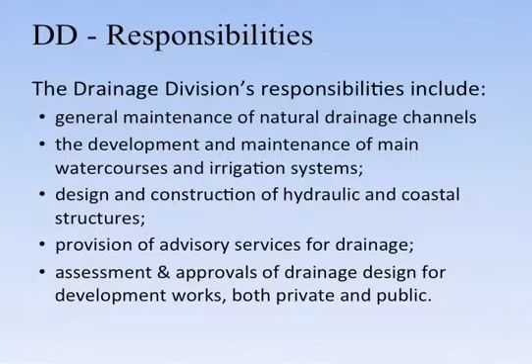So, without much ado, we'll now proceed to the role of Drainage Division as it relates to the challenges of disaster preparedness and management and what attention is required. But first, we must start from the beginning. Drainage Division. Drainage Division's original responsibilities involved only maintenance according to the Waterworks and Water Conservation Act. Over the years, the roles and responsibilities have expanded and evolved to include designs, construction, coastal approvals, land development approval, and a lot more as shown in the slide.

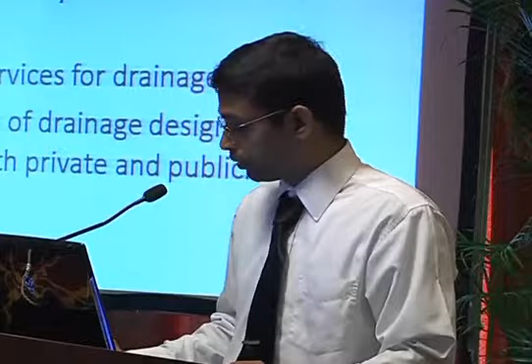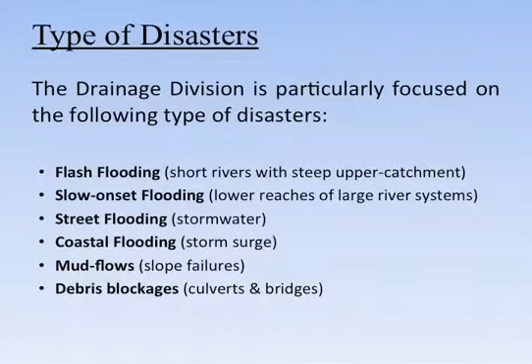Type of disasters. I don't have to elaborate on disasters because it has already been done from the start of the section. Now, notwithstanding the administration and financial challenges, Drainage's main focus is to identify the type of disaster that occurs, such as flash flooding, slow-onset flooding, street flooding, mud flows, and debris blockages. This is essential to providing a correct solution as well as a course of action in the event that these do occur.

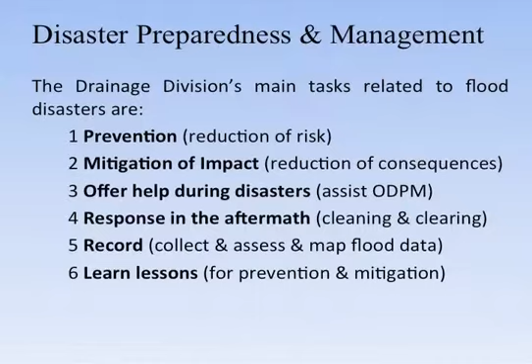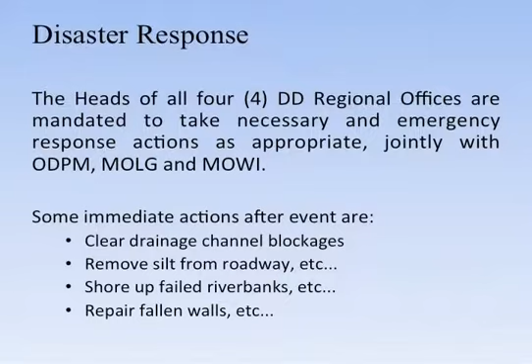So, what happens then? The drainage main task is to identify a process by which they acquire knowledge and shift their focus on flood mitigation measures to concentrate on the problematic areas. Based on the related tasks, such as the response and the aftermath, it involves clearing and cleaning. Emergency actions are taken with the respective approval. These are actions taken in the aftermath of flooding that occurs on, for example, the PBR bus route or the Eastern Main Road.

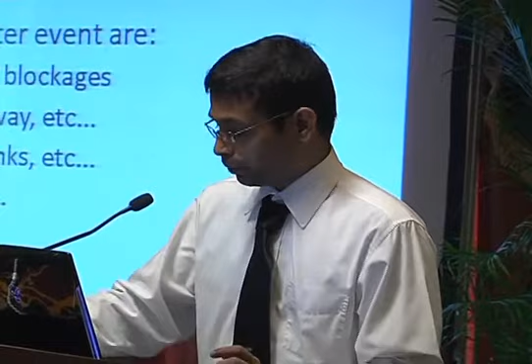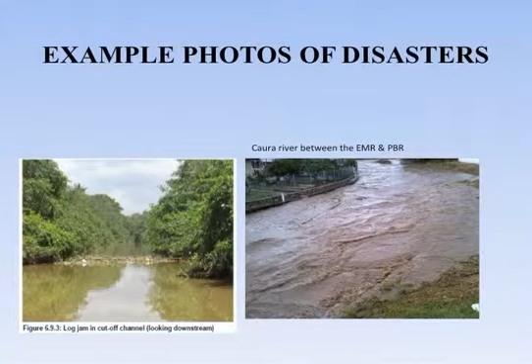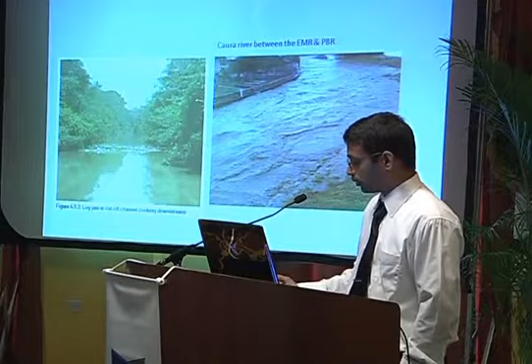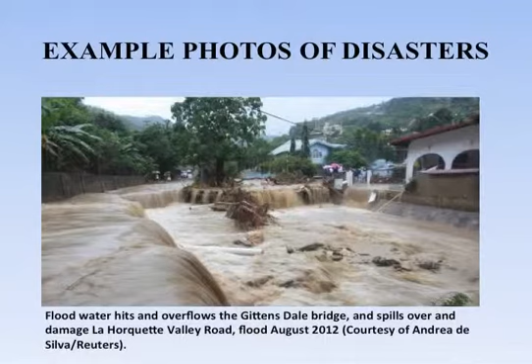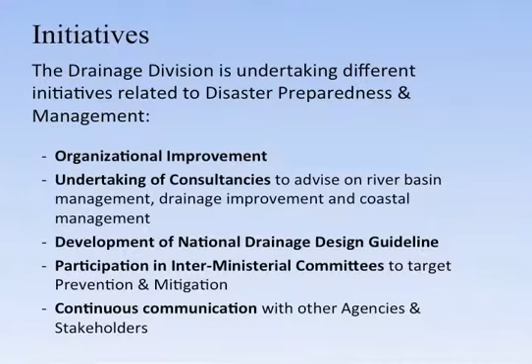Initiatives. In keeping with the drainage motto, working harder for a better tomorrow, Drainage has cross-examined the organization, hired external expertise such as consultants, developed new guidelines, and set up a steering committee to deal with the problem in a more proactive way.

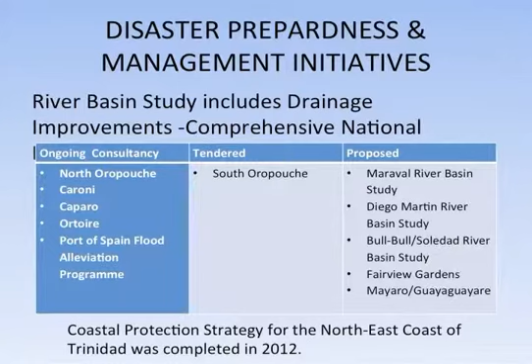Now, Drainage has more focus on the river basin studies, which outlined the ongoing consultancy, tendered and proposed. They also have the coastal protection strategy for the northeast coast of Trinidad, which was completed in the year 2012. The objectives of these studies are to mitigate the frequency and severity of flooding, optimize the use of available water resources, and reduce environmental degradation.

The North Oropouche River Basin Study. The North Oropouche River watershed is located in the eastern part of Trinidad and drains approximately 425 square kilometers, approximately 8.5% of Trinidad. This watershed harbors approximately 48,000 persons, who have experienced flooding in low-lying areas. For the purpose of the study, it was further subdivided into 4 zones: Lower Oropouche, Gunness River, Sangre and Guayco River, and other areas. The solutions presented are very similar to other studies, which are summarized later in the slides.

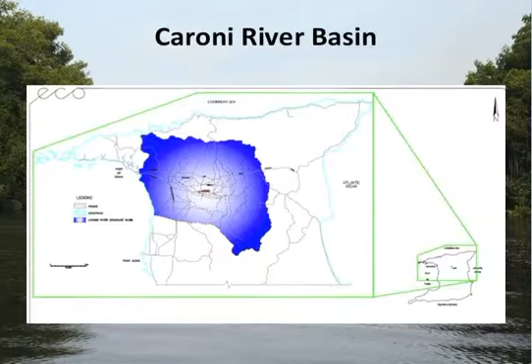Caroni River Basin. The Caroni River Basin is one of the largest in Trinidad. It originates from the confluence of the rivers Aripo and Komoto in the central part of Trinidad between the northern and central ranges. Water discharges into the Gulf of Paria just south of Port of Spain. The Caroni River Basin drains approximately 750 square kilometers of the north and central range of the island.

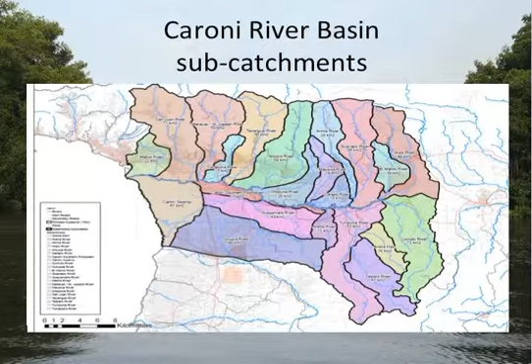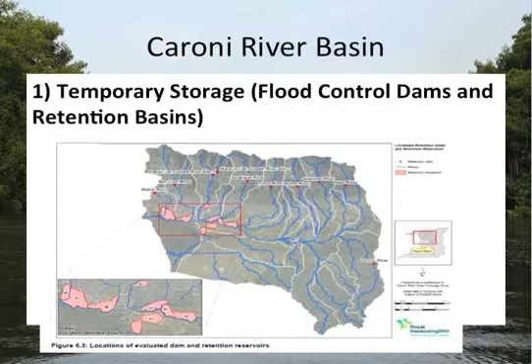As we can see here, the software used was HEC-HMS. They subdivided it into different catchment areas for the purpose of design. They were designed for 1, 5, 10, 25, 50, and 100 year return periods. This was modeled accordingly. Several solutions were identified, and the major solutions for the construction of flood control dams and retention basins are shown in the next slide. This map shows the approximate location of the Caroni River Basin, and where the dams and retention ponds are to be placed.

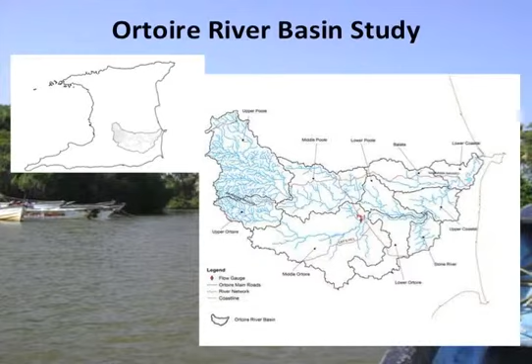Ortoire River Basin. The Ortoire River Basin is Trinidad's second largest river catchment, approximately 475 square kilometers. The western area is characterized by sloping lands and minor watercourses and is relatively densely populated. The strongest feature is the Naparima-Mayaro Road, running in an east-west direction. The flood zone areas identified by the consultants are shown in the following slides. These are the more concentrated areas in which they have done the analysis, data verification, rainfall data analysis, and proposed solutions.

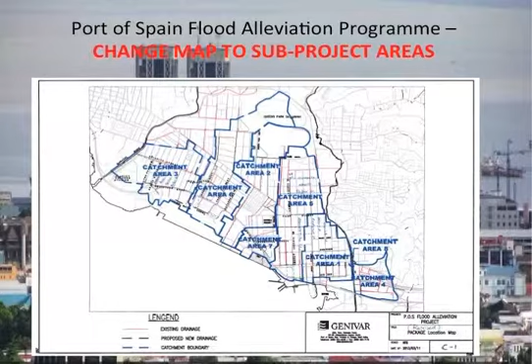Now, the Port of Spain flood alleviation program. It is well known that the capital city of Trinidad and Tobago experienced perennial flooding. Consultants were hired to propose solutions based on the catchment area. This subcatchment area was developed into 8 working packages to alleviate local flooding. The return period that it was designed for was 1 in 25. This program is now being undertaken by the PEU, the Program Execution Unit within the Ministry of the Environment and Water Resources.

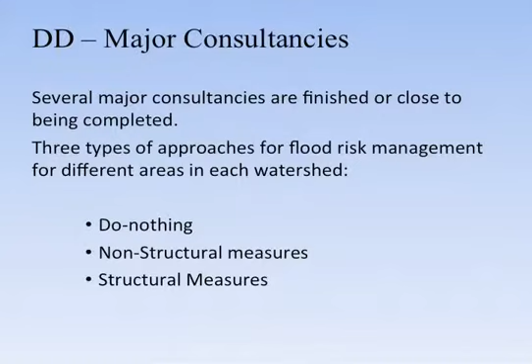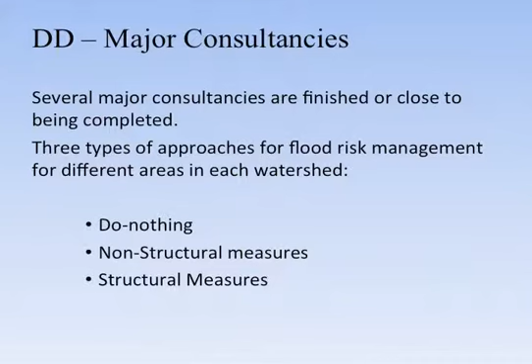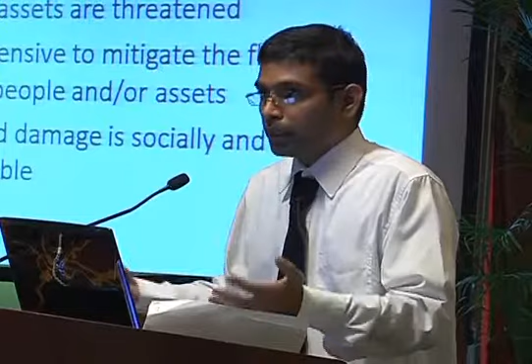Now, as we see, there are several major consultancies that I have shown. Based on the investigation and ongoing study, Caroni, Caparo, North Oropouche, they have all identified 3 aspects: do nothing, non-structural, and structural measures. The do nothing approach was analyzed using a cost-benefit analysis, and some of the factors that were considered are listed here. If it was more economical to do nothing, minimizing the losses, this approach was considered, but again, considering the amount of flooding that actually occurs.

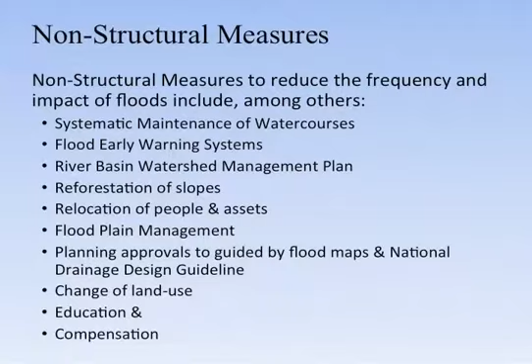Non-structural. This is the softer side of engineering. Some are short-term solutions, while others focus on the revision of the policies, such as floodplain management, land use, education, compensation, reforestation.

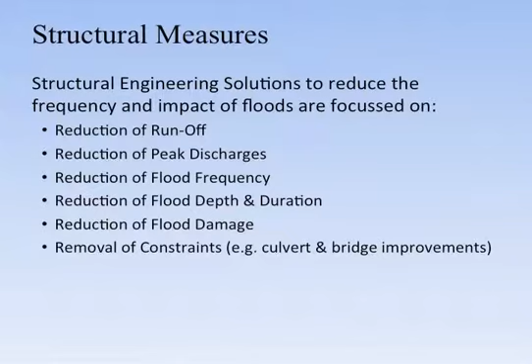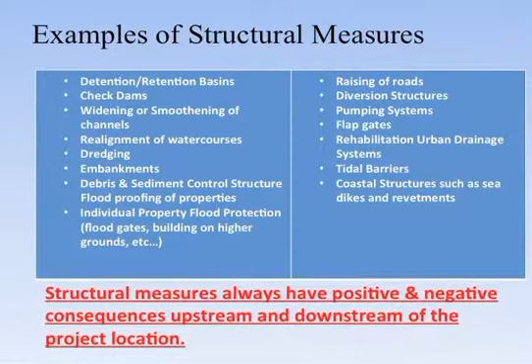Now, as we proceed, structural measures were proposed where there were no existing drainage networks but they were required, while other areas focused more on the flood-prone areas where the drainage network required much improvement. These factors, again, were considered. Some of the examples proposed in these consultancy services were these structures: detention and retention ponds, check dams, realignment, dredging, embankments. They were more focused on proposing new hydraulic structures to alleviate flooding.

Now, the main challenges for the drainage division. It is a well-known fact that disaster preparedness and management is a very important task. The performance during an event also reflects what happens within the division itself. As we move forward, we will examine the internal structure of the drainage division. They have categorized it into technical, organizational, financial, conflicts of interest, mentality, and dependencies on other agencies.

The technical aspect: the approach was to include climate change and sea level rise into the consultancy services. So these consultancy services cater for these. The local technical capabilities need to be reviewed. Also, watershed management will be proposed within the river basin study or ongoing studies.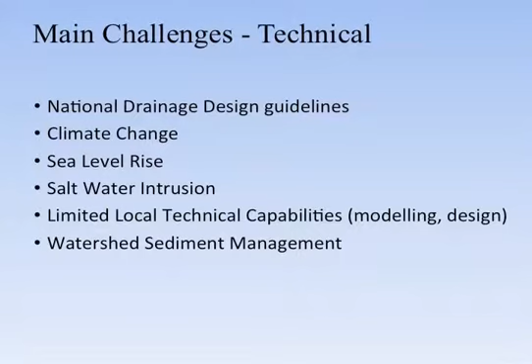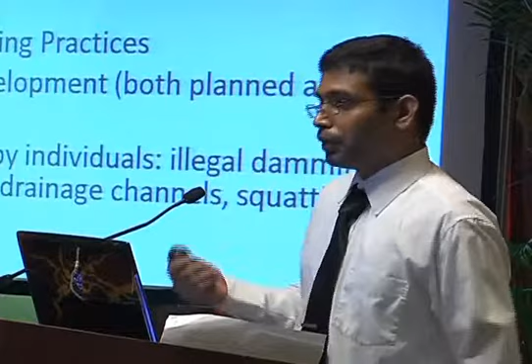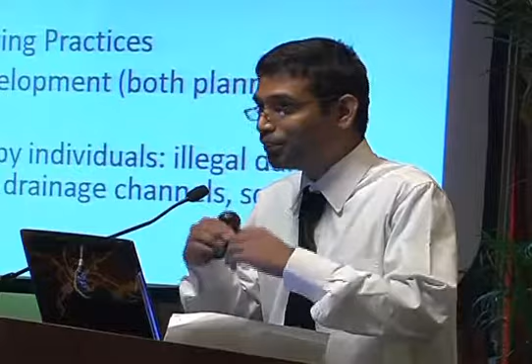So, illegal initiatives. People believe that within their property they are sole masters. They control whatever is there, realigning the drains accordingly, but this is not so. You must also get approval for doing that.

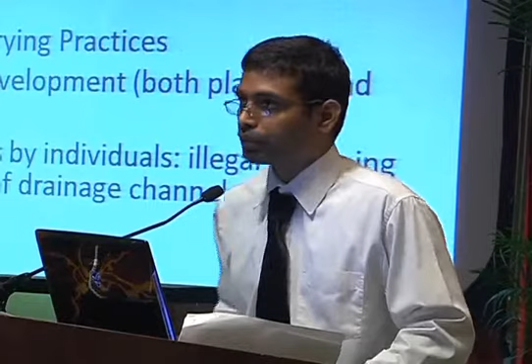Conflicts of interest. As many have mentioned over and over again, communication is definitely a problem. We have actually looked at acquiring a parcel of land at the Sea Lots, where different agencies are not aware of the performance of other divisions or what they use it for. Take UDeCOTT. UDeCOTT has identified it as a parking area, whilst the Ministry of the Environment and Water Resources has identified it as a proposed retention basin.

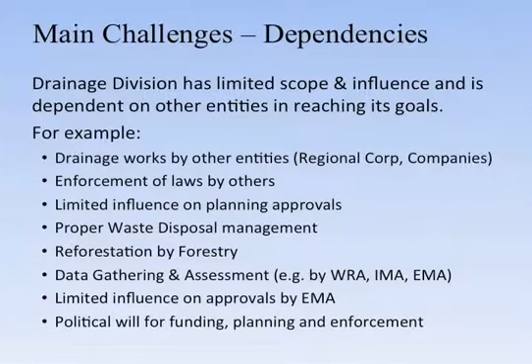The main challenges and dependencies. We have limited scope and influence, and it's dependent on other entities. Basically, the drainage division cannot function as a single entity. It is dependent on other entities. And these are examples of what can happen, like reforestation. Without reforestation, again, massive sedimentation, Caroni River.

Limited influence on planning approvals. We need enforcement, right? Political will for funding, planning. We're not planning according to the politics, but rather they are buying into what we stand for.

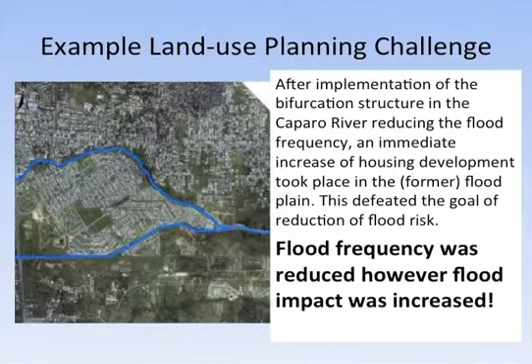Now, the Caparo River. Previously, this was a sandpit, which was used for quarrying and was exploited. We are currently faced with the problem under the Caparo River study that there are proposed solutions to now utilize this and integrate it with the Mamoral Dam. Not only that, they have also looked at watershed management to utilize that water as potable water, for irrigation purposes, residential and commercial use. This is what is proposed.

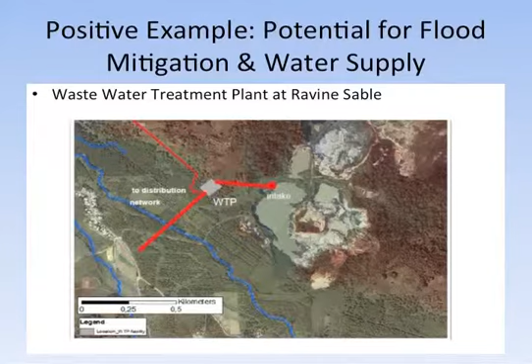This study was done by WASA, and this report was actually integrated into the Caparo River Basin study. It projected the needs of the people and how much water was required, hence the implementation. The area of improvement that was identified was recognized. These are other initiatives: reforestation, steering committee, consultancies. Well, we already saw that. Strengthening of our bonds, liaising with relevant agencies for law enforcement, education campaigns.

In conclusion, the traditional focus of the engineer was dealing with peak discharges; there is a shift towards an integrated watershed management approach, with more focus on the reduction of peak runoff and improved use of the limited resources. Flood risk reduction and disaster preparedness require much more than engineering solutions and need the involvement of all citizens. Flood risk is expected to continue to increase in future.

So what happens is that we must give priority to the government. Also, we have looked at sustainable green solutions towards alleviating the flood.